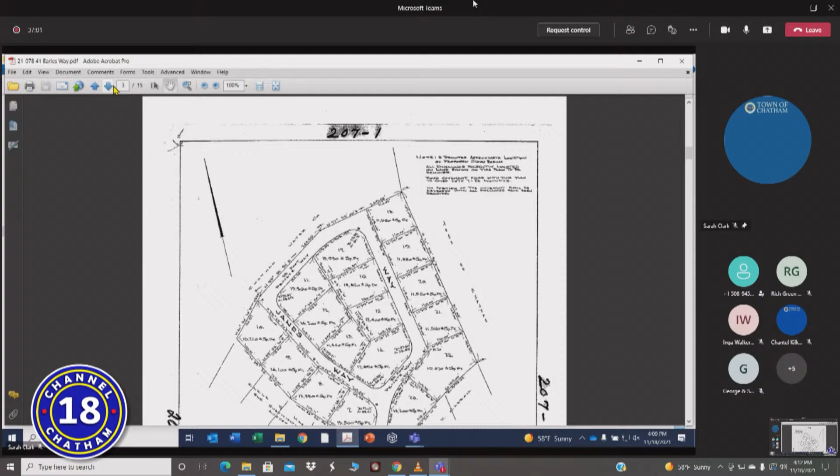I sent in your packet, the back two sheets are site plans. They were prepared by Dan Spearman. The very back page was the as-built plot plan when the foundation was put in. And so, as you can see, they show the foundation being 37 feet from the street line. Then it shows 38 feet to the rear property line. So if you have 38 feet, you subtract 12, which is the width of the deck, then you have 26 feet. So they're in compliance.

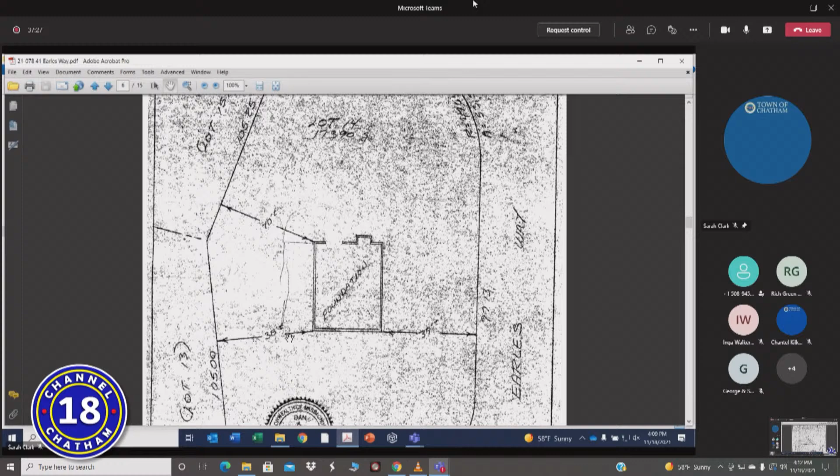However, if you look at the plot plan that was submitted when they requested the special permit, the building is 38 feet from the street. And I think what happened was when you add cladding to the foundation of the building and then add cladding to the enclosed porch, now you're short by a foot on the setback to the rear property line.

And so Dan Beacott, who did the presentation in 2016, is here today. And what he recounted to me, and he'll be happy to answer questions from you folks, is that originally they intended to remove the existing deck and build a new deck. And then when they started working on it, they had discovered that the framing timbers were in great shape, it wasn't that old, and they decided to just build on top of the old one without realizing that the old one was in violation of the sideline setback as well.

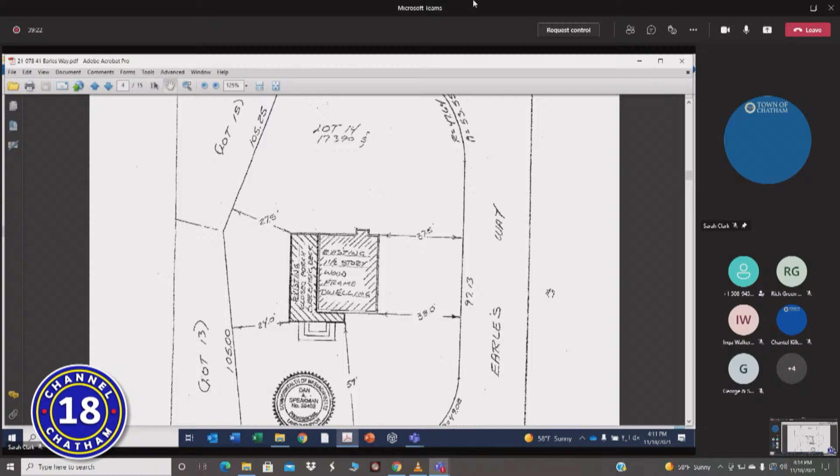So it was built. And then in 2020, an as-built plan was requested by the town. Which is the next sheet, working from the back. So this is the December 17th, 2020 plot plan.

And that shows the distance to the rear property line as being 24 feet. So at that time, Jay Briggs, who's present here today, said that a variance was necessary. He was under the belief that it was a brand-new deck, and a variance was required.

In any event, so we filed a request for a variance, which is what's before you today.

A variance is something that you can grant if you can find circumstances that, owing to the circumstances relating to the soil conditions, shape, or topography of such land or structures, especially affecting such land, but not generally affecting the zoning district in which it is located, and a literal enforcement would involve substantial hardship, financial or otherwise, and desirable relief can be granted without substantial detriment to the public good and without nullifying or substantially derogating from the purpose and intent of the bylaw.

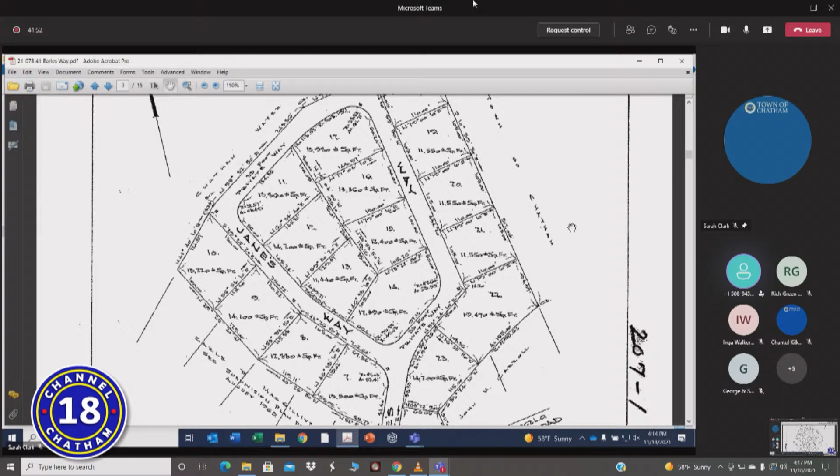So is that a substantial hardship? Well, that's within your discretion. What I would say is that it is a hardship, and it's a very minor issue under the zoning bylaw, because clearly, at least I believe it's clear, that relief could be granted without any public detriment, certainly no harm to the public here. And you're not substantially derogating from the purpose and intent of the bylaw.

If you've been to the site, as I'm sure you all have, it's very heavily vegetated. In fact, you don't even know where the property line is when you're on the site, because Steve and Lisa planted a whole series of arborvitaes there along the back line. And so there's sort of a wooded section between the Canoe property and the two lots behind it.

In addition, the Canoe property is lower than the properties behind it, so that the enclosure of the deck does no harm, there's no detriment to the adjoining properties. So I think that

Where the deck has actually been there since 1986, and the enclosure's been there since 2016, you could find that a variance in this instance is a very minor matter, zoning-wise, although it's a substantial matter when it comes to attempting to correct it. I mean, the cost associated with such correction would be substantial. So we would ask for your consideration in that regard.

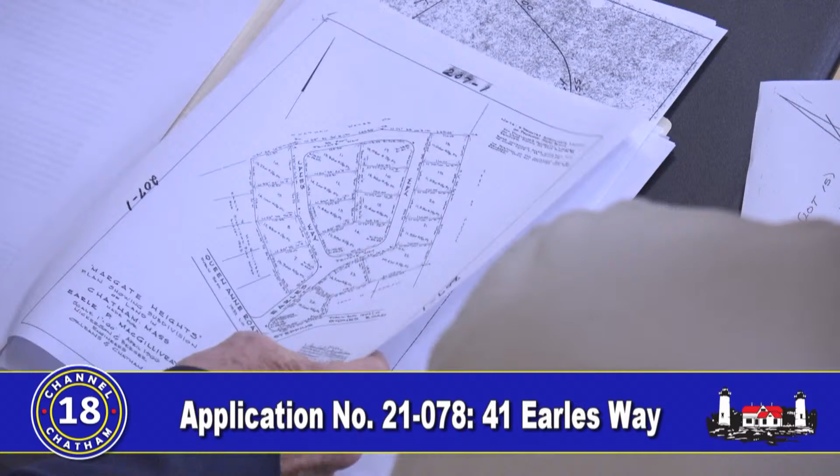And so it didn't look like it was tapered. Even when I look at this piece of paper now, now that you mention it and really study it, it looks a little tapered, but a foot in a smaller scale is not something that just picked off my eye. But again, I agree, I should have just gone by the numbers and realized they didn't add up to 12 foot there. But I was under the assumption the original deck was the footprint we were going to be using, so I was more concerned with that 25-foot off the lot line than the other numbers.

So this blueprint that Mr. Spearman did was dated 2016, and we're seeing the as-built print dated recently, last year. When did the construction take place? In 2016, right after we got the permit, we began the job and worked through that winter to complete it.

On the print dated August 23rd, 2016, in large letters it says 'as built.' That was confusing to me. If you're submitting a blueprint for an application, there shouldn't be an as-built, there should be a proposed. I agree.

I don't think you can hold that against Dan, though. Oh, I'm not holding anything against anybody, I'm just looking at all the facts, and they're asking me to decide what we're gonna do, and I see a lot of confusion.

In the essence of time, we chose to use Dan as the surveyor because he was the original surveyor with a lot of that neighborhood. So I thought it would be, in the essence of time, the best way to get the proper drawings and documents ready. That's why I used him, and I don't think he realized it was still the as-built as well.

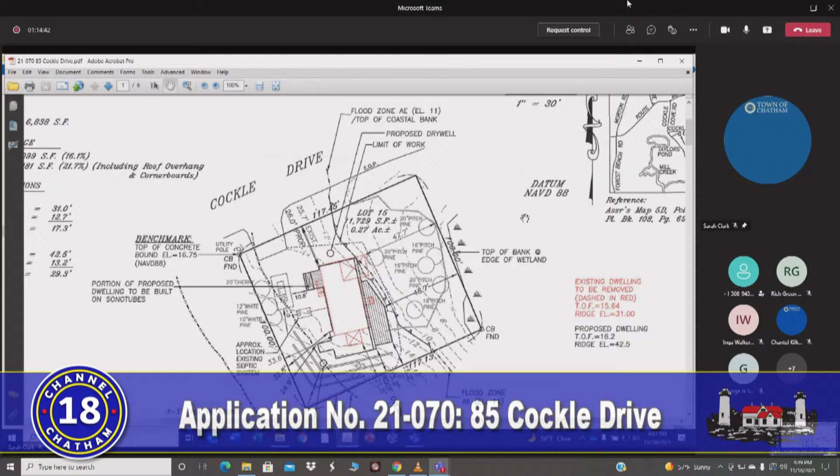As to the extent of increase in nonconformity, the nonconformities were as noted by Sarah. Coverage increases by 382 square feet, but again it's relocated out of the floodplain, so we're increasing somewhat one nonconformity, but doing our best to eliminate another. As to suitability of site, the site has been developed since the house was built in 1960. We've had a very thorough review by the Conservation Commission, which is why we had to ask you for the extensions.

Teresa could not be here, but on her behalf I would explain, and David can comment further, that there is significant mitigation planting, some 3,600 square feet of mitigation, involving replacement of lawn, addition of 80 native shrubs and 12 trees, a lot of native grasses and wildflowers.

I believe the Conservation Commission has not only closed the hearing, but did they write the order yesterday, or are they in the process? Mr. Little reports they're in the process, but I believe there is a letter that Sarah or the chair will read indicating that that is the case.

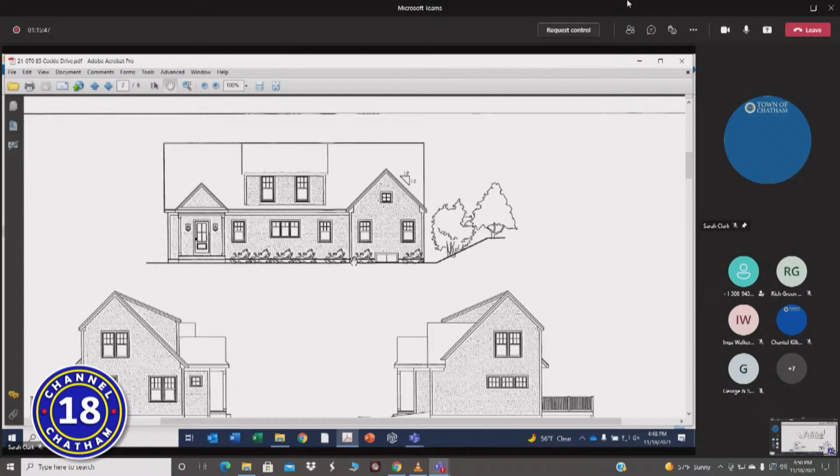Thank you, Mr. Chairman. As to scale, siting, mass, views and vistas, the existing house speaks for itself, perhaps not eloquently, and it might be time to replace it. What is proposed, as shown on the site and elevations you've seen, is a traditional salt box, fortunately not a gambrel. I think it is an attractive and thoughtful design by Bernadette McLeod, and I think will be an improvement on the streetscape that is there now.

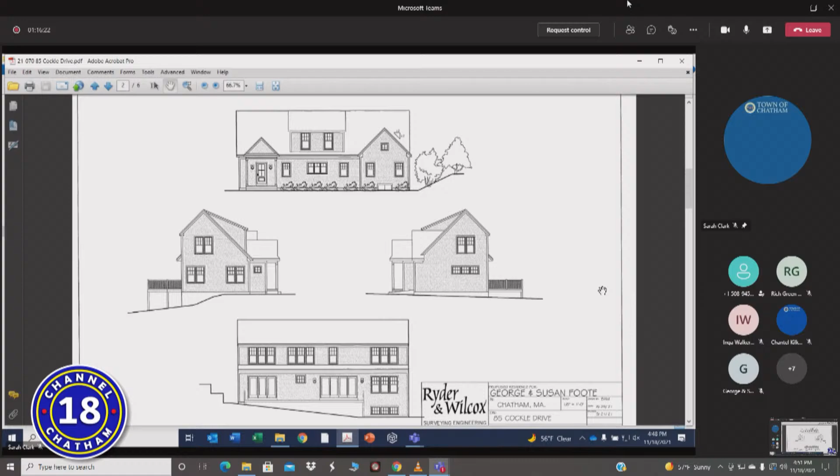We also didn't want to go too high to block views from up above, so we were cognizant of that. As to compatibility of use, it will remain residential. There's no change, although it may be designed for eventual retirement and more year-round use. As to the adequacy of water and sewage, we have town water and an on-site functioning and up-to-date Title V two-bedroom septic system. There's no change in that regard.

As you can see on the site plan, the septic system is located as far away from the marsh as is possible. Mr. Chairman, would you like me to ask David to comment on the conservation aspects at this point? Mr. Little, if you would be so kind.

Good afternoon, David Little. We did go through a couple of hearings, the result of which is the plan that Bill passed out today with his packet from Teresa Sprague of Blue Flax Design, which shows a significant restoration of the property between the marsh and the existing dwelling. We really had no opportunity to locate the dwelling and the addition in any other place than we show on the plan, simply because we're maintaining the setback to the street.

The septic system requires certain setbacks to the foundation, and then we did have the opportunity to come in a southerly direction because of the R20 zone and the 15-foot setback requirement. So even though we were coming into the hill and removing trees on the south and southwest portion of the property, Teresa Sprague's restoration plan provided several new trees. Where I am showing the 3 terraced walls on the southwest side, that allows for the house to be built with normal frame walls in a level area rather than being built into a hill, which would have required a concrete wall extending up above the first floor.

So those terraced areas are proposed to be planted with native plants and shrubs as well. And then finally, I believe in the note from the Conservation Commission, one addition that I made to our site plan was we provided a stone drainage trench on the easterly side of the parking area on Cockle Drive.

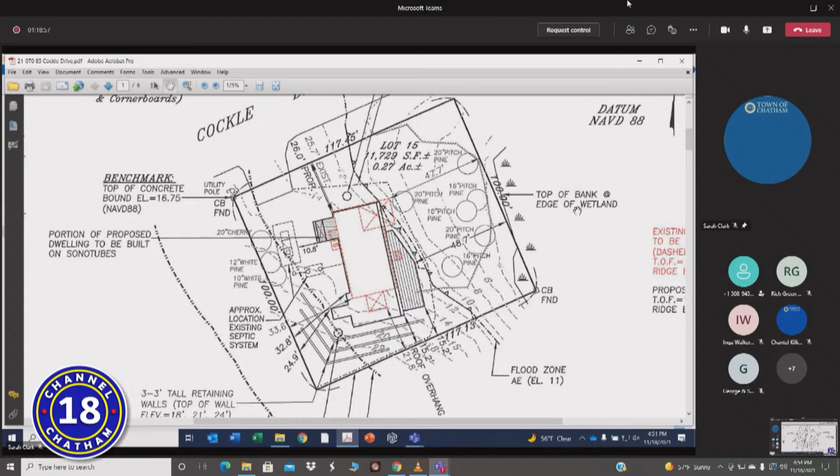One of the Conservation Commission members wanted to see the paved parking area changed to gravel. So I went out to the site late last Friday when it was raining just to observe what was happening with the stormwater, and whether it was a gravel drive or not, I think because of the slope, there still would have been stormwater washing onto the site from Cockle Drive. So I proposed a 2-foot wide by 3-foot deep infiltration trench along that easterly side of the driveway, which will properly infiltrate the stormwater runoff. That's the only significant change that was made to my plan. I would be happy to answer any questions.

Thank you, Mr. Chairman, and thank you, David. The other criteria are not really at issue, but as you know, what is at issue is whether replacing the current structure with a new and reasonably expanded home, moving the house completely out of the floodplain and elevating it 5 feet above flood elevation, is substantially more detrimental to the neighborhood. I think you can find that it is not substantially more detrimental.

The new house will be shifted back from and elevated out of the flood zone. As David has indicated, there's extensive mitigation planting, dry well and drainage trench for stormwater runoff, with significant improvements to the wildlife habitat adjacent to the marsh. It's admittedly, as David said, a challenging lot given the steep hillside terrain as well as the floodplain, but the retaining walls will be heavily vegetated and thus allow rainwater to infiltrate rather than run off. I think the design is sensitive to the location.

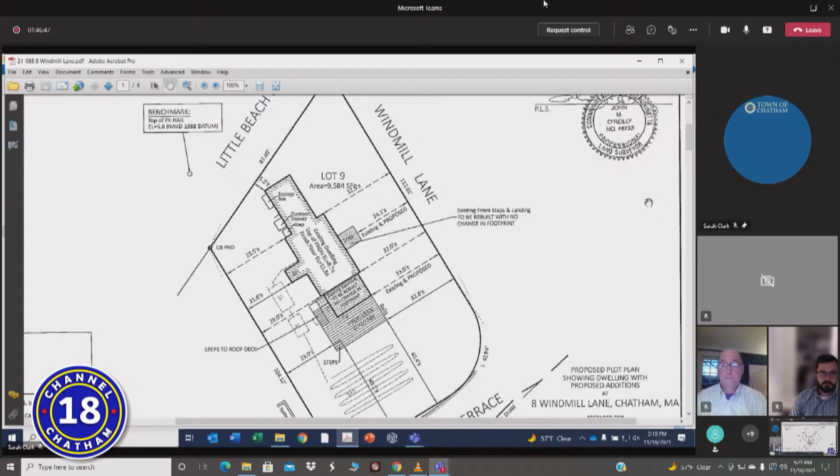So we think it's addressing concerns, and we hope the board agrees that this modified proposal is certainly not substantially more detrimental to the neighborhood.

Going into the criteria: adequacy of the size of the site, including but not limited to maximum lot or building coverage or setbacks. We believe the size of the site is adequate for the proposal. It's a small parcel and the existing structure is already nonconforming as to coverage and setbacks.

The existing porch and sunroom is going to be rebuilt within the same footprint. The building coverage will remain the same as currently exists and below what is allowed by the zoning bylaw. Many of the structures in this neighborhood are located well within zoning setbacks, and the proposed deck at 23 feet from the westerly sideline and over 38 feet from Windmill Lane is in no way crowding the neighboring properties.

Number two, compatibility of the size of the proposed structure with neighboring properties. This neighborhood is a mixture of homes with various styles and sizes. The proposed structure is modest in size and compatible with other structures in the neighborhood. The building coverage remains unchanged, and the addition of the deck structure is a similar feature found with other homes in this neighborhood.

Number three, extent of proposed increase in nonconforming nature of the structure or use. The entire proposal, including the front entry stairs, sunroom, and deck, will be located at or within the existing setbacks and does not increase the building coverage.

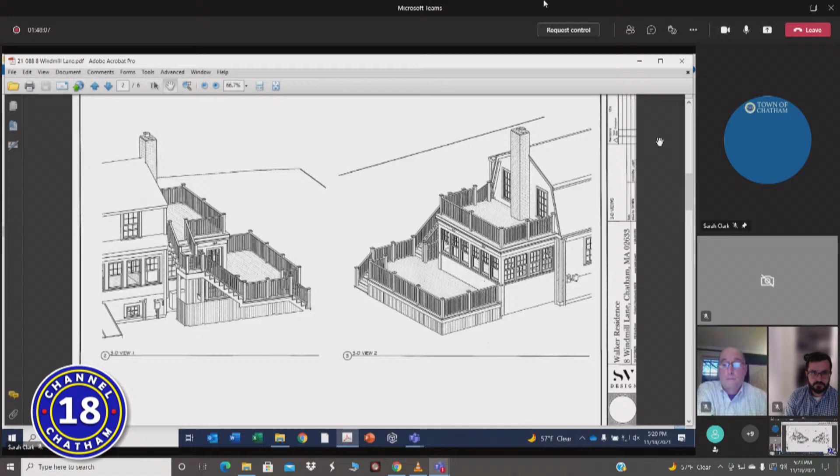Number four, suitability of the site, including but not limited to impact on neighboring properties or on the natural environment. We believe the site is suitable for this project. The project has been approved by the Conservation Commission, and the construction work can be completed without any negative impact on the neighboring properties.

Number five, impact of scale, siting, and mass on neighborhood visual character. We don't believe there will be any negative impact on neighborhood visual character. The footprint of the rebuilt sunroom is remaining the same, and the proposed design is in keeping with the characteristics of the neighborhood.

Additionally, by locating the new decks on the southerly side of the house, the applicants are limiting the visibility of those decks from Little Beach Road. Number six, compatibility of the proposed use with neighboring uses: single-family residence in a residential neighborhood, and therefore it is compatible.

Number seven, method of sewage disposal, source of water, and drainage. The property has a functioning Title V septic system, is connected to town water, and has appropriate drainage.

Number eight, there will be no negative impact on traffic flow and safety. Number nine, there will be no impact or additional noise and litter caused by this project. Number 10, adequacy of utilities and all other public services - the property has all necessary utilities.

Number 11, visual impact on the neighborhood and neighboring uses of any formula business, which is not applicable in this case, of course. And 12 relates to the additional criteria under the bylaw for dwellings located in the floodplain.

The only lateral expansion of the structure is the new deck, as the proposed sunroom, as I mentioned, will be rebuilt in the existing footprint. We don't believe the deck expansion has a negative impact on the impervious area of the site, and as mentioned, the project's been approved by the Conservation Commission.

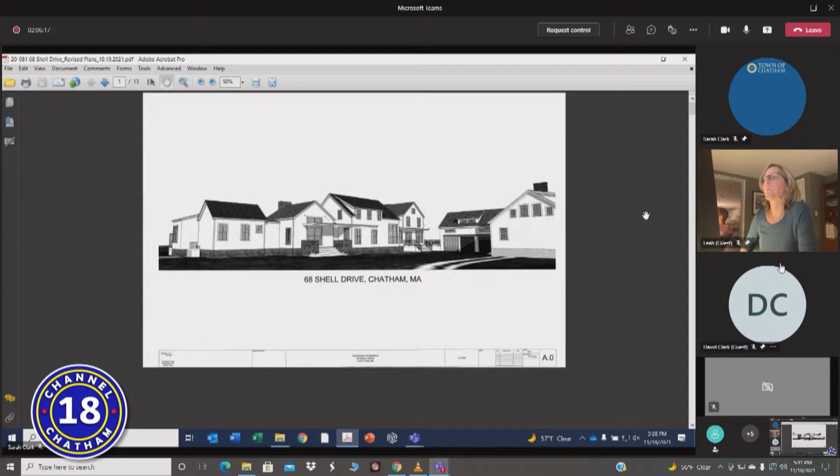We eliminated a bedroom and any living area above the garage. We lowered the roof as much as possible. Last time, if you remember, we were right up against the roof height of 30 feet. We have 4 inches to spare now, so we do have a little margin of error.

We certainly plan to have that measured once framing is complete to make sure that we're spot on. The pool is now a 3 to 4.5 foot deep, above grade plunge pool, so it's basically going to sit at deck height, and that's all that is.

So those were all the major concerns I heard at the last meeting, and if you'd like, I could walk through the ZBA criteria responses. If you want me to, do. If you want me to read that? Yeah, okay.

I have exhibits that go along with these. I don't know if you want to show them as I go, but we can do that. No, that would be really taxing, I think, on Sarah and not necessary. Okay, that's okay. So go ahead. Okay.

Adequacy of the size of the site, including but not limited to maximum lot building coverage and setbacks. The existing lot coverage is 3,697 feet, proposing an increase of 2,358 for a total of 6,055 feet of lot coverage. We respectfully ask the Zoning Board of Appeals for a special permit on this.

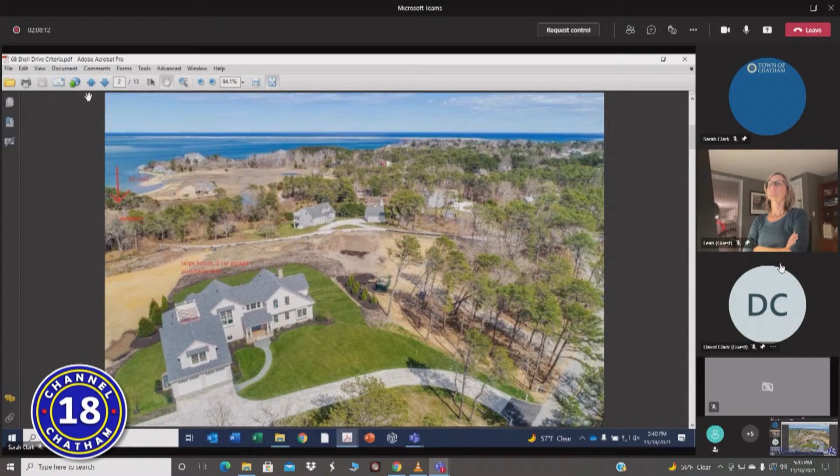Compatibility of the size of the proposed structure with the neighboring properties. The proposed structure is very similar in square footage to the 3 new residences constructed at the beginning of Shell Drive at Witter Road. Those homes are on much smaller parcels and have 2 floors of living plus larger basements. We will not have any basement for mechanical, laundry, storage. Also, they have pool sheds as well.

Extent of proposed increase in nonconforming nature of the structure or use. The increase in nonconformity with building coverage is based on contiguous buildable upland due to the AE11 special flood hazard area. We respectfully ask the board to make an exception for this unique property. Property is almost 3 acres of land, and the proposed building coverage is only 5% of land area.

Suitability of the site, impact on neighboring properties and the natural environment. The site is very large and extremely private as it sits down below the neighborhood. There are no close neighbors to impact. The property was developed approximately 300 years ago without buildable upland as now defined.

There will be no impact to slopes or water runoff into neighboring properties, as we do not intend to regrade or fill the earth. A much larger proposal was analyzed by the Woods Hole Group and found to have no negative impact on flooding. The natural environment will be greatly improved at 68 Shell Drive, with significant removal of invasive plants and replanting with all native plants as approved by the Conservation Commission. The land restoration will include many thousands of square feet of land using native species with high wildlife habitat value.

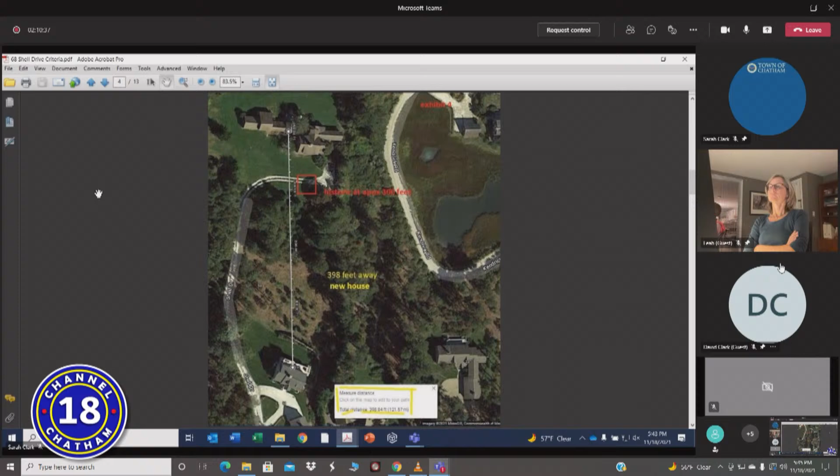58 Shell Drive is 398 feet away from the new house and 280 feet from the proposed historic guest quarters, measured by Google Earth. 58 Shell Drive is at elevation 41, and our highest proposed ridge peaks are at elevation 37.9. They will continue to look over our roof and out into the bay.

We have located the new home to be very much in the same location as the existing houses and barns, and have reduced the size east to west, or left to right, from 170 feet down to 152 feet, potentially opening up new views for the greens.

Compatibility of the proposed use with neighboring uses: there is no change in proposed use.

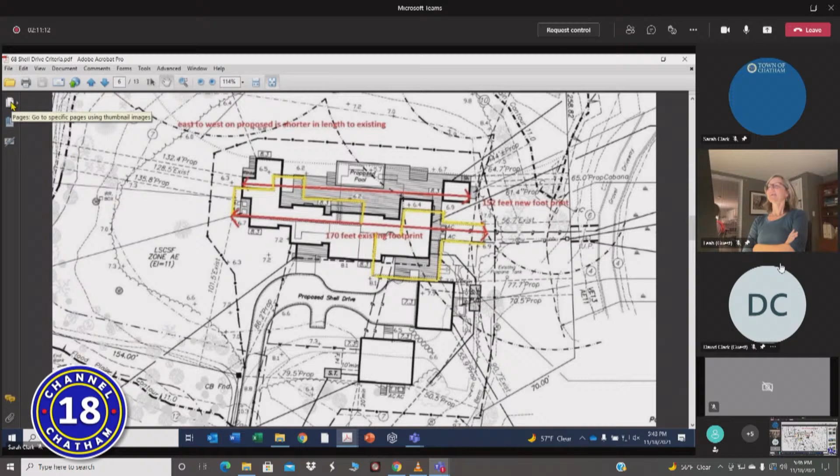Adequacy of sewerage disposal, source of water, and drainage. The new house will be connected to town water, which is at our property line on Shell Drive. Sewerage will be connected to the existing leach field for the new house, and a small two-bedroom septic system for the historic guest quarters.

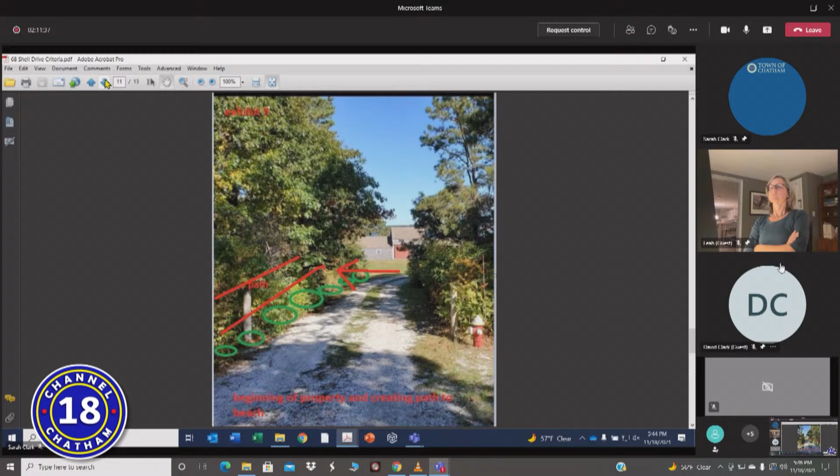Impact on traffic flow and safety: there is no negative impact on traffic flow, as there is no change of use. We will improve the safety of the traffic flow. Shell Drive is a dead-end road, and there are only 6 homes up the hill who currently have beach access on our property. We will be making a clearly marked path with shrubs that runs along the west side of the driveway, leading to the wooded path. This will keep cars away from those coming to and from the beach path.

Noise and litter: noise, no change from existing. And litter, we believe there will be improvements, as the existing house is abandoned and we are not there to collect any beach litter, as well as siding and roof shingles that are blowing off due to deterioration.

Adequacy of utilities: the utilities are adequate. We have a verbal agreement with a neighbor, Mr. Nouse, to allow a 10-foot utility easement to cross a small section of his property to access the electric pole and gas line on Kendrick Drive. We have been in contact with the utility companies, and they are prepared to do this upon permitting.

Visual impact on neighborhood uses: not applicable. Number 12, for those dwellings located in a floodplain: the extent of lateral expansion proposed and the extent to which it impacts the impervious area of the site. The extent of the lateral expansion of the dwelling will not have a negative impact on the flooding characteristics of the property.

The analysis prepared by the Woods Hole Group clearly indicated that the project, as originally proposed and much larger, had no negative impact on flooding. This revised project reduces the site coverage, and therefore it is presumed that this reduction would also have no impact on the flooding characteristics of the area. Similarly, the Woods Hole report concludes that the increase in impervious surfaces has no adverse impacts on the flood characteristics.

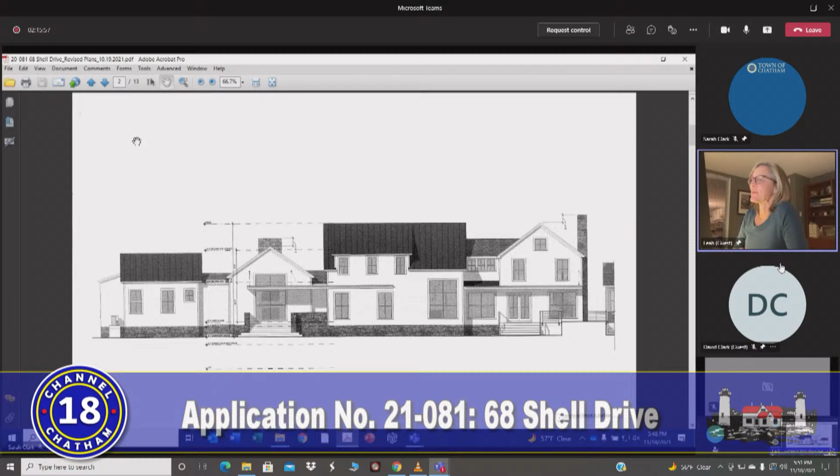Yes, great. When I was asked to come and look at the design, or relook at the design, I took all my hints and clues about what I thought this should look and feel like from what was there. And I think what was there is absolutely lovely — it's an old house that has been added onto over time.

So it's a series of attached and collective buildings. I very much wanted this house to feel like it was not built all at once, but added onto over time, with a similar feel. But there's also the fact that this is a modern house — it's going to be energy efficient, so I didn't want it to be too traditional at the same time.

The main house, the two-story building in the middle, started with the exact dimensions of the old house—that's essentially what this is. It got a foot or two wider, I think, but otherwise it's exactly the same dimension with exactly the same roof pitch. That roof pitch of the old existing house is the same everywhere on all the main building blocks you see here. I very much wanted the old house to feel like it still belonged here, like this house had a dialogue with the old house, and that it felt like it was built over a period of time.

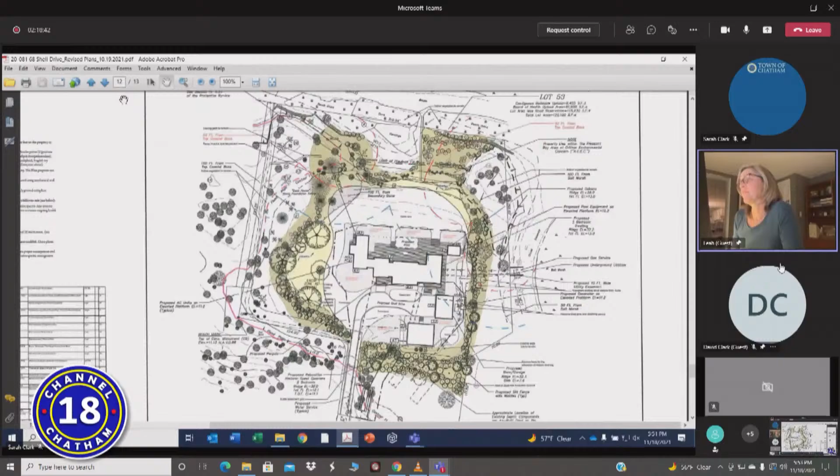Other than that, if you have specific questions, I'm happy to address those. Otherwise, I think that gives a good summary of how I came at this and how I think the design fits into the spot.

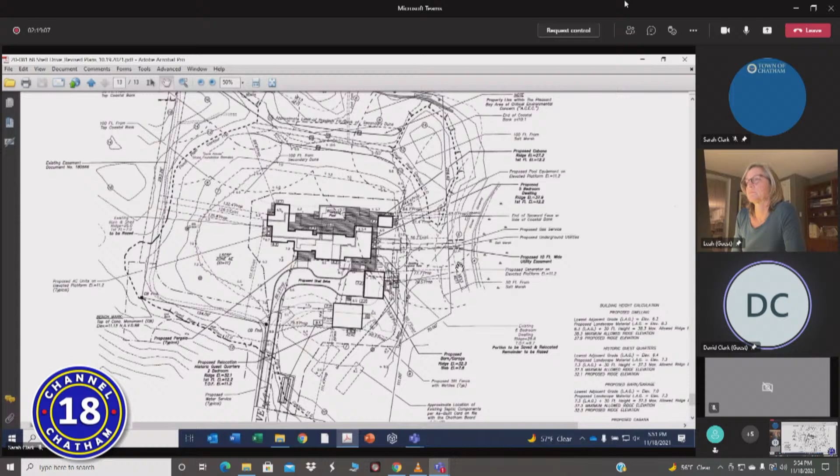Thank you very much. Dave Clark, do you wish to add anything regarding the site plan? No, I think I'm just here for questions. Very good. Thank you. I think we've come to a point where we'll move on.

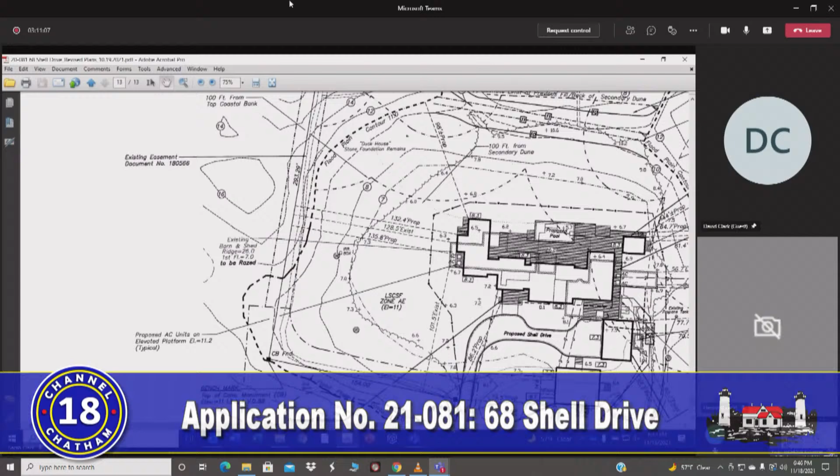Joe, you'll have to stand back at the mic, they can't hear you over there. Right where your cursor is, that's the easement path that runs along the western side of the property, and that dumps out right now at the driveway. It actually begins there, but in actuality it dumps out right at the corner. So part of my criteria for traffic flow and safety was to have a clear path right there, so anyone, if there's kids coming back and forth from the beach, they're not running right out into the driveway.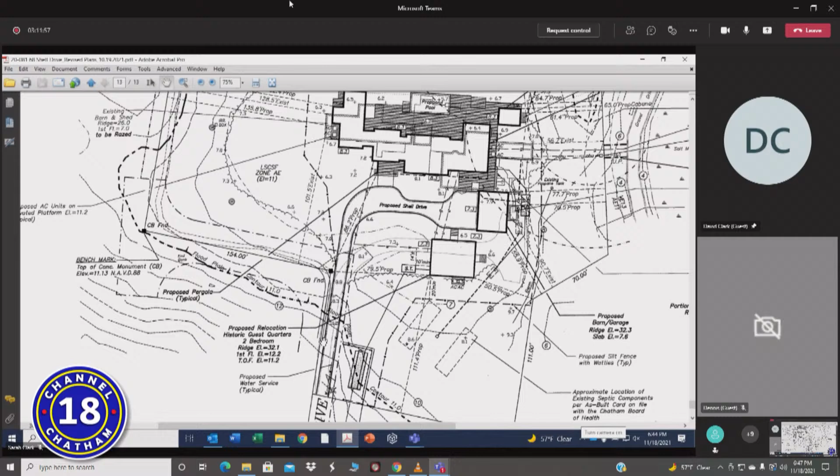That was the question. Okay, any other questions that have come up? You skipped me. No, and it's not the first time, all right, let it go. Didn't you ask a question? Yeah, like way long time ago in the question section. That's what we're doing, yeah, seriously, we're still in. Oh my God. Apology accepted. Yeah, I do apologize. That's okay.

Just one thing did come up, so I'll double check with Dave Clark, but since there was some mention from a few neighbors about height, I did a little math on the site plan here. And it appears to me, Dave, correct me if I'm wrong, that the highest part of the new ridge is 8.1 feet higher than the existing ridge. That's what I get from what the site plan shows. No, just give me a second to confirm that. It's 37.9 to 29.8.